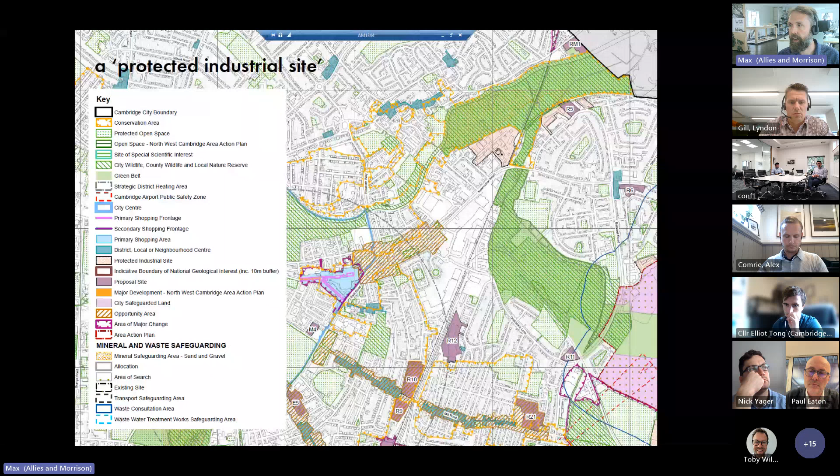It's a conservation area, and there's some really interesting ecology, and it's protected open space as well. So it's a very lush, green and open, well-used space, as you all know, and that contrasts quite significantly with the site itself, which is an important employment site, but in terms of quality of public realm is very much hard, dominated by hard surfaces and industrial, utilitarian buildings, vehicles and roads.

So the surrounding character contrasts really with the openness and green commons outside the site. There are a few notable features nearby, obviously the railway, but also the Leper Chapel, which is on Newmarket Road near the bridge. There are some views available on Newmarket Road with the Leper Chapel in the foreground, which we'll talk you through later.

Also the relationship with Stourbridge Common is really important, and how the building appears behind those trees. What we've done is structured this presentation and our ideas around nine key themes. I'll draw your attention to one or two of them.

One is this building's appearance. How much should the building be seen? Will the building be seen? How much should it be screened? How much will it be screened?

We're very keen to enjoy the silhouetted appearance, the layered silhouette that the building might offer against the backdrop of the trees and tree line of Stourbridge Common, and also the idea of introducing as much green infrastructure as possible, making it an enjoyable and safe environment, and pleasurable to be in, while maintaining those industrial uses and the good growth that Cambridge relies on.

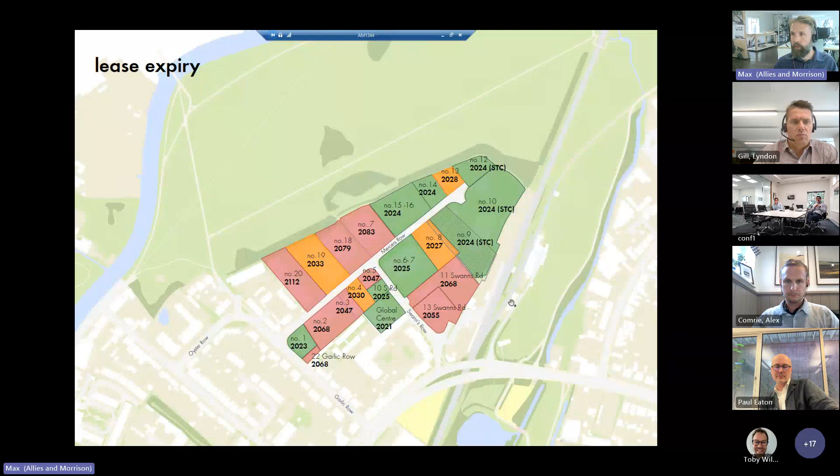The first theme is this idea of enabling change, enabling sustainable change. Here you have the lease expiry dates, and you can see in green the upcoming ones. The intention is, as Toby mentioned, to submit a hybrid application, so one that allows the earliest phase...

...which is available now and actually vacant already, and enabling works have already begun - some of the demolition has been carried out already - for that phase to come forward as a detailed application now or soon. Then phase 2, which includes a number of other plots on Mercers Row, some of which will be available soon, to come forward as the next phase.

Part of the idea is that this might enable and encourage wider changes, improvements and enhancements, particularly of the public realm, and also of the way the buildings relate to the street. That's a very important theme in terms of creating a strong street scene, which we'll come onto in a moment.

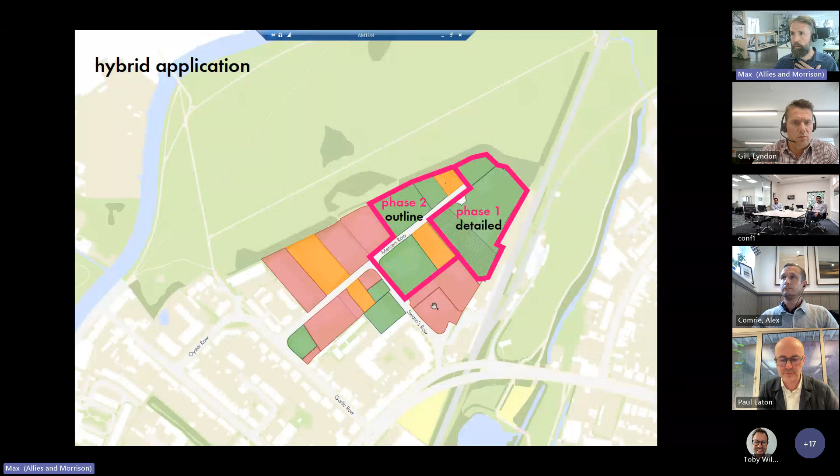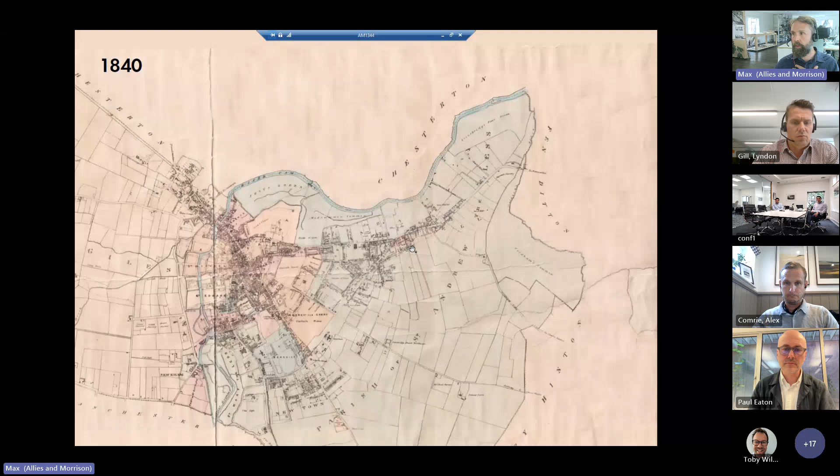One of our ideas is to really root this development as much as it can in the history of the site, in this special part of Cambridge. It's, as you know, sandwiched really between the river and a key artery into the city.

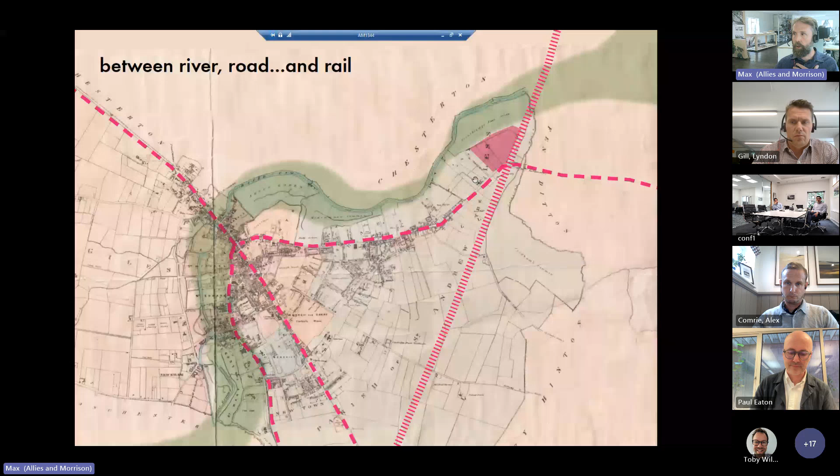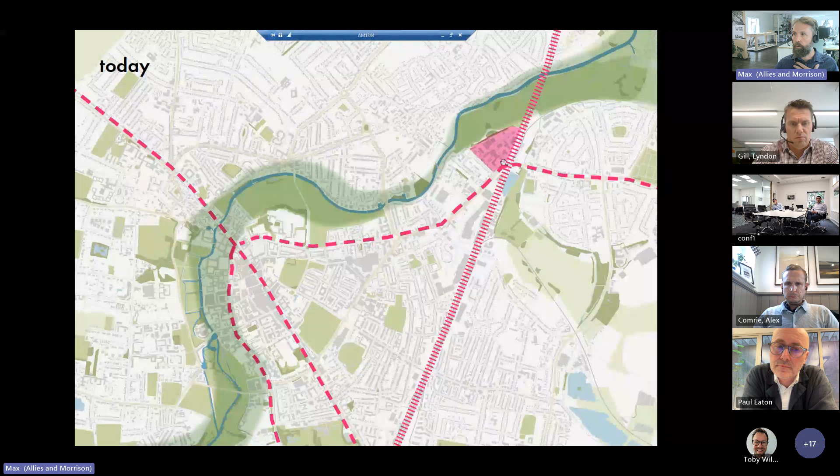It's in a part of Cambridge which was always more of a working, industrial part of Cambridge, and also latterly, with the introduction of the railway, became in a way a node between these three major pieces of infrastructure, which it still is today. So it's still very much dominated by its relationship to Newmarket Road, the railway, and the river, alongside Stourbridge Common.

The other element that we're really keen to understand and allow to influence our thinking around the site is the Stourbridge Fair, which I think is actually upcoming - the event in September to mark the fair at the Leper Chapel.

It was obviously at its time an incredibly active and lively coming together of all sorts of trades and industries, and notable members of scholars at Cambridge also, including Newton, purchased items there.

I think he purchases prisms apparently at the fair.

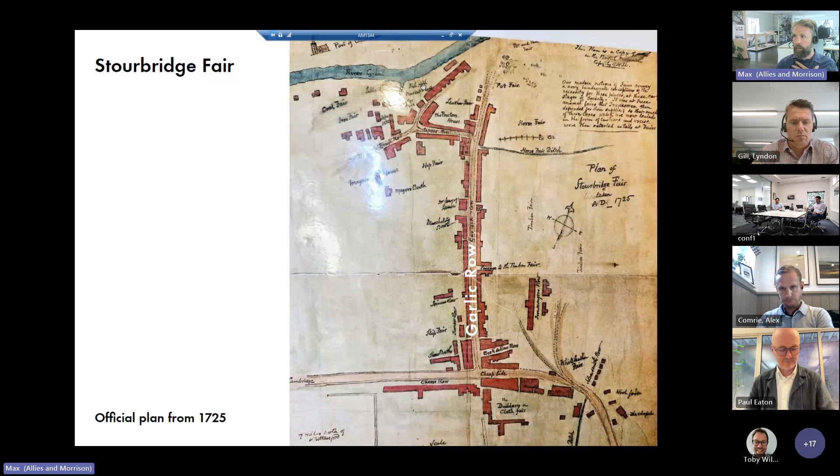It was a temporary event, and we were quite interested in how it has influenced and shaped the site today. Subsequently, industrial uses arrived, so its trade and employment character remained, but many of the buildings or structures were temporary. If you hold in your mind these tent-like structures, you might find some echo in the design of the buildings we've come forward with later in the presentation.

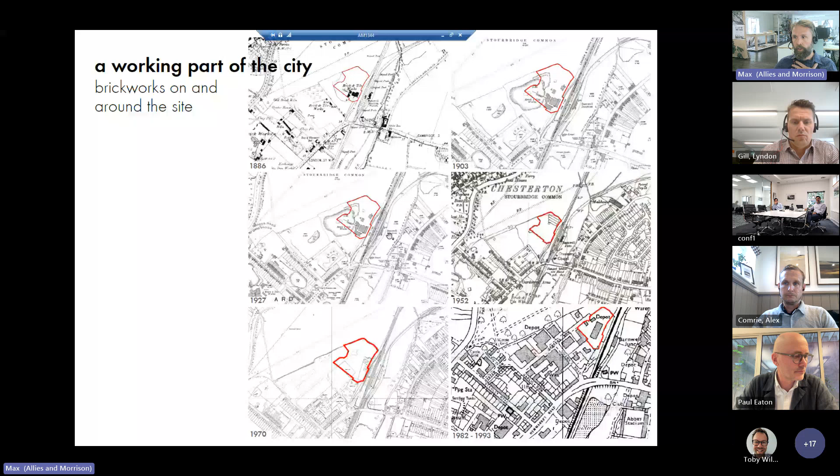So, after the Stourbridge Fair kind of lost its momentum, the site was largely taken over by industrial uses, including brickworks on and around the site, numerous brickworks and tile works, and there were significant excavations as part of that, which have led to the reservoirs or bodies of water near the site as well.

The railway, the arrival of the railway, and Barnwell, there's quite an important junction into Cambridge, and the gasworks, which are further along at the Tesco site. But here, interesting, you can see the excavations as part of the brickworks there.

Subsequently, many of the nearby streets or areas were redeveloped for residential. So at this moment, the site today has a mixture of uses, both employment uses and residential uses, and I think it's an important aspect which we'll come on to later.

One of the things we've explored through the pre-app process quite a bit is the potential for a wider connection from the site into Stourbridge Common. Now, this is not part of our application. It's something that the application will allow for in the future, should the council and the Stourbridge Common Nature Reserve want to bring that forward as an opportunity.

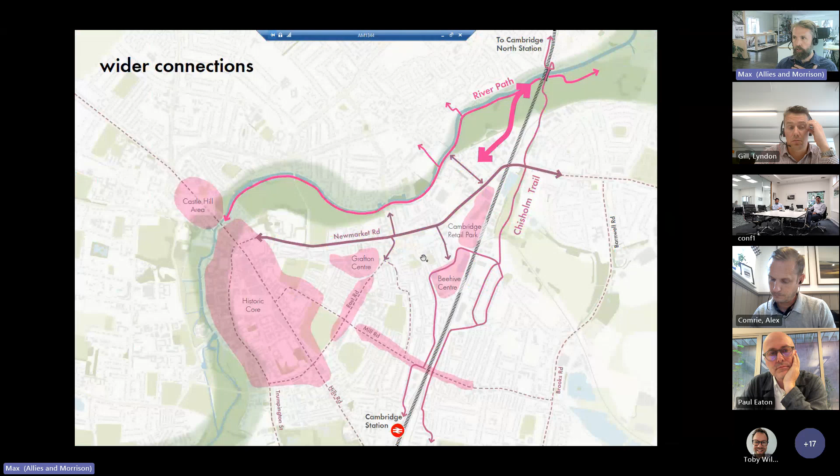But there is a potential opportunity to connect the river path that takes you all the way into the centre of Cambridge and to Cambridge North and to Fen Ditton, to connect that into the site at the end, and transform the site from a dead end, transform Mercers Row from a dead end to a potential through route into the common. But as I say, that's not part of this application, but is something we're allowing for in the future.

And even some of the uses that characterize the site today could be accommodated, right up to larger units, which are perhaps more suited to light industrial and production spaces. And indeed, there's an occupier at the moment - Levidian, who already occupy the site, and they're interested in a larger space. They're on their journey of growing as a company. They're a climate tech firm specializing in converting methane into hydrogen and graphene, and they're looking for space. So they're the kind of occupier that might take one of the bigger spaces.

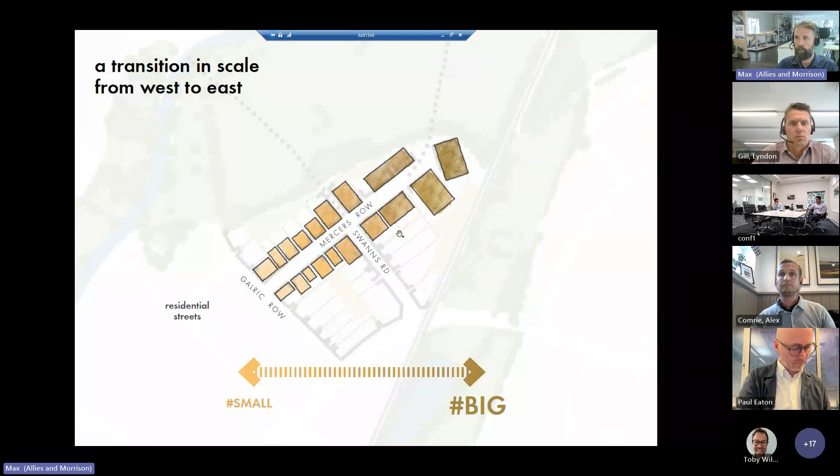So just to touch on the distribution, we felt, given the residential streets nearby, a broad strategy of larger spaces - this is already reflected on the site today, with larger footprints and larger scale further to the east, where they're relatively well screened and far away from residential - to smaller units along Garlic Row as a broad conceptual move. Obviously we're looking at phase 1 and phase 2 here at this end of Mercers Row, but broadly it helps to structure the thinking. So hold that in mind as to the scale of the units later on.

The other thing that's really important to us, and has dominated discussions particularly with urban design, is the idea of fronts, sides and backs to create a strong street scene. That's something not really apparent in the site at the moment, where many buildings have entrances at the rear, yards at the front, dominated by vehicle movements and vehicles full stop. It's often not clear where the entrance to a building is, where the streets are, and the street is very undefined.

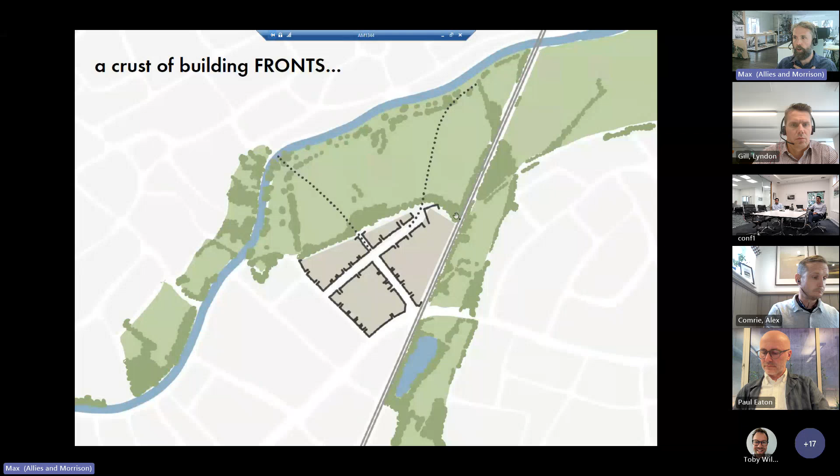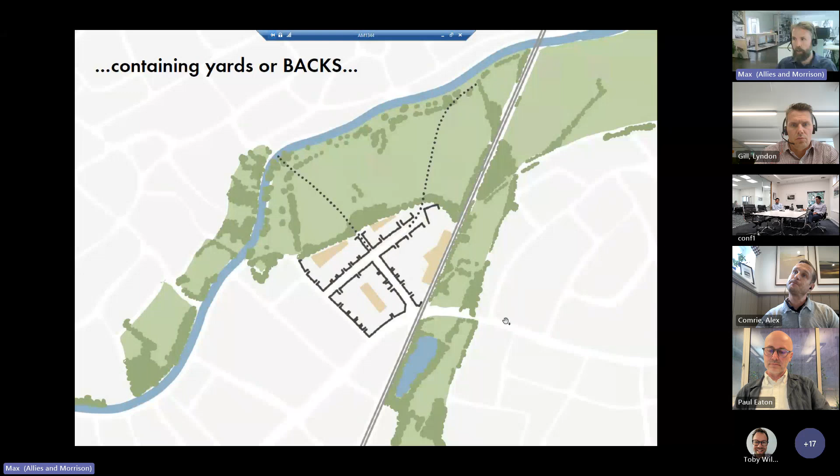It can be in places quite a hostile environment. So one of the ideas is really to create a strong crust of building frontages along Mercers Row, and then contain the yards and consolidate the yards, the service space, if you like, away from the street, where it's A, not visible, but also B, doesn't impinge on the pedestrian environment as much as it currently does.

So to create a separation of those spaces at the rear, where possible, consolidate them and confine them to the backs, and then connect them via lanes or sides of buildings, which are, where possible, as narrow as possible, allowing for vehicular movements when necessary, but avoiding impinging too much on the street itself or the character of the street.

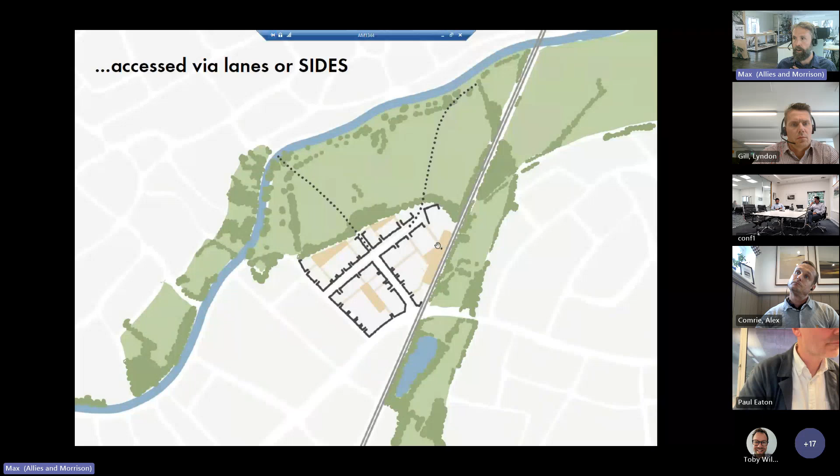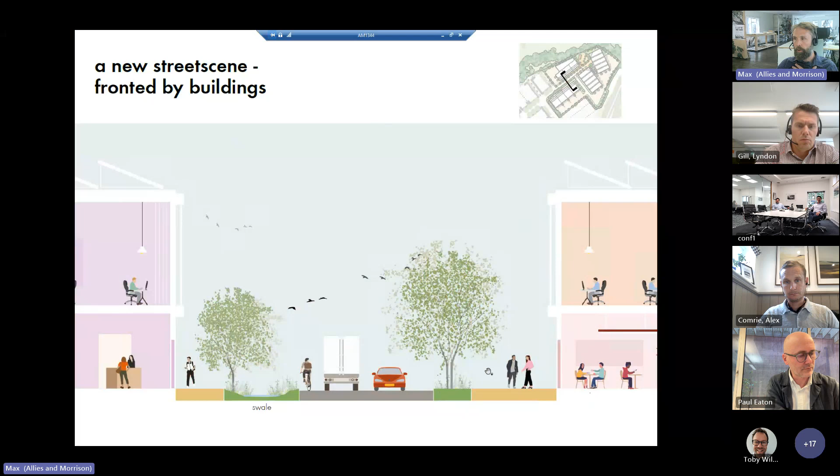So this is our conceptual cross-section for Mercers Row, if you like, where you have buildings with strong frontages, with active uses and entrances facing out onto the street, wider pavements, and introducing as much greenery as we can in the public realm, and then the yards at the rear, away from the street.

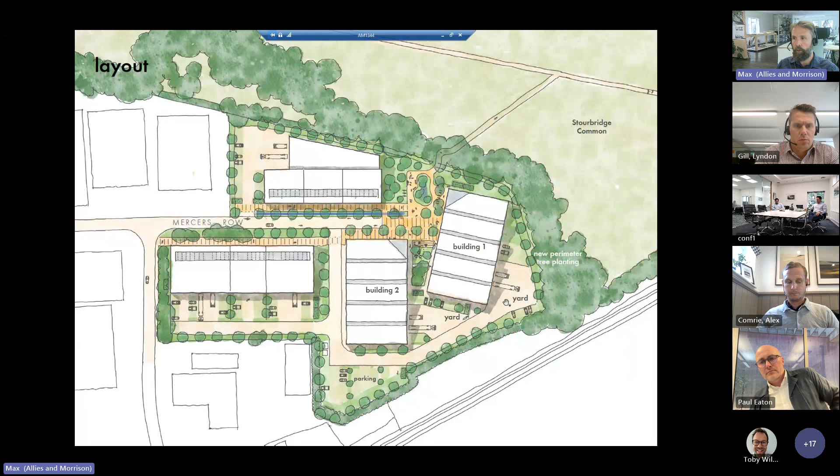And we've also introduced a new place to gather. So this is, you may have seen, a key theme of the scheme: the creation of a new square, or a pocket park, if you like, that acts as an arrival space at the very end of Mercers Row.

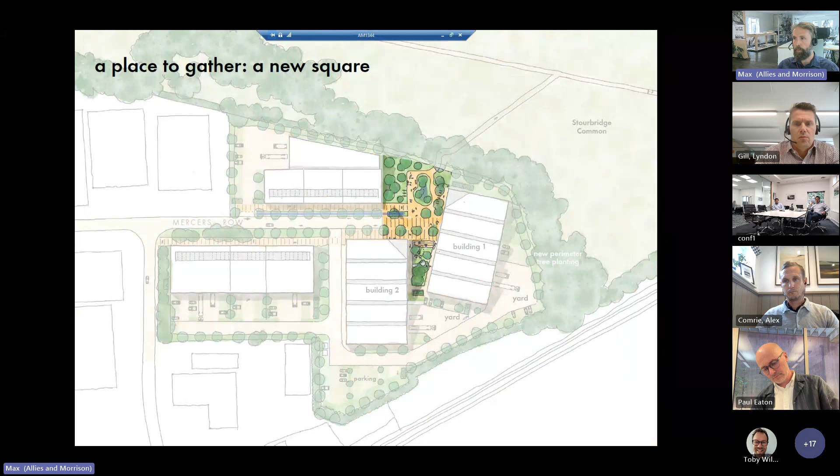We're able to stop up part of the road, so reduce the amount of adopted highway and give that over to public realm. In this area here, we've also introduced some green space between buildings 1 and 2 as amenity space, and then a space in phase 2 that sits just adjacent to Stourbridge Common.

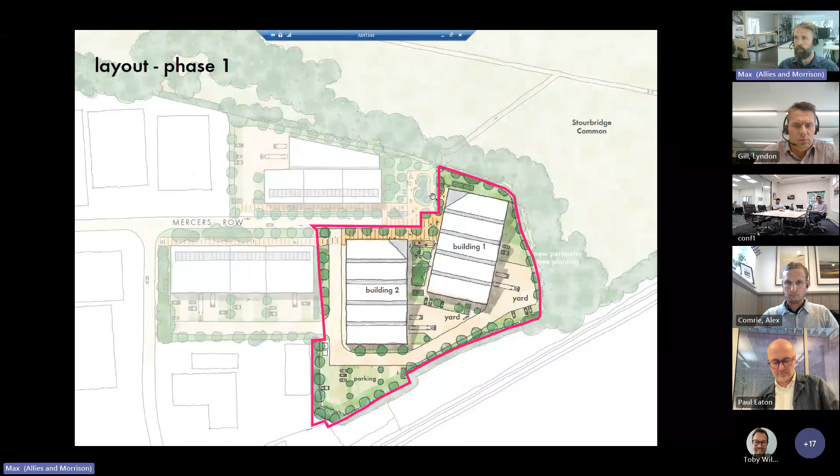So this is the boundary for phase 1, and you can see here this is the public realm that we're delivering as part of phase 1, and the remainder of that space will be delivered as part of phase 2.

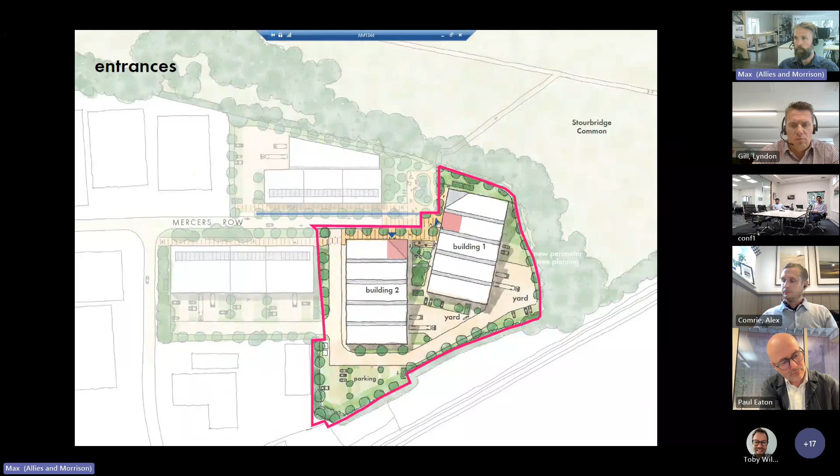It's very important to us also to activate that space, as I mentioned, so the building entrances have been placed at key moments along it. Building 1 has its entrance as a kind of termination to Mercers Row, and you can see we've angled building 1, partly for environmental reasons, but partly to accommodate the yards at the rear and screen those yards, as I was explaining earlier. We've placed the entrances of building 1 as a termination, and then building 2 on the corner there.

The other important feature of these two larger buildings is that they have an element of mezzanines which contain the office space. So what we've tried to do is place those mezzanines where people will be working directly adjacent to the facade in the office space. We've placed those in areas where they're overlooking the open spaces, so overlooking the public space here, and then overlooking the street as well. So we've thought quite hard about how the mezzanine relates to the other spaces in the building, which will be more industrial type spaces with higher floor to ceiling.

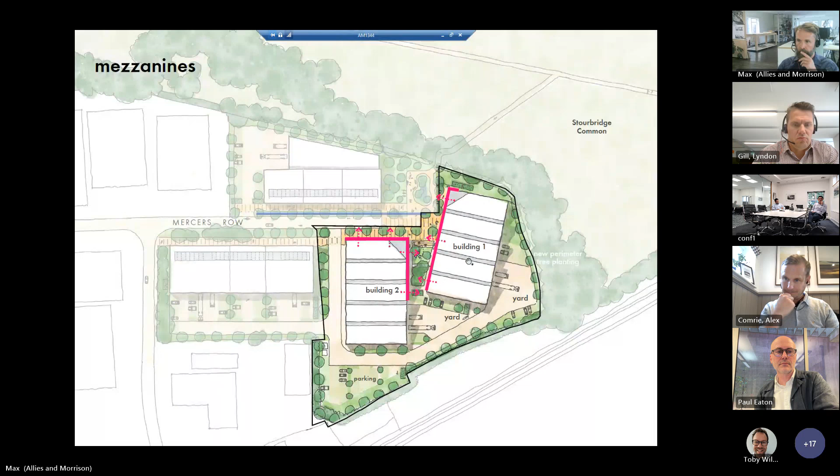So to move on to building appearance, we've been thinking very much about how these buildings are both screened and seen at the same time. And the relationship to the common is really the most important element of this.

While we're interested in how the building might appear and how there might be glimpses through the tree line, we're also conscious that we don't want light to become too dominant a feature of the view at night, and indeed impact on wildlife. So we've been thinking carefully about window placement to ensure windows are there where they're really needed, and contribute to an attractive setting for Stourbridge Common.

We've also been looking at scale, and there are some precedents of bigger buildings around that are quite visible from the common. For example, the Maltings at Ditton Walk, which is a large four-story warehouse building with a strong silhouette rising up behind the trees.

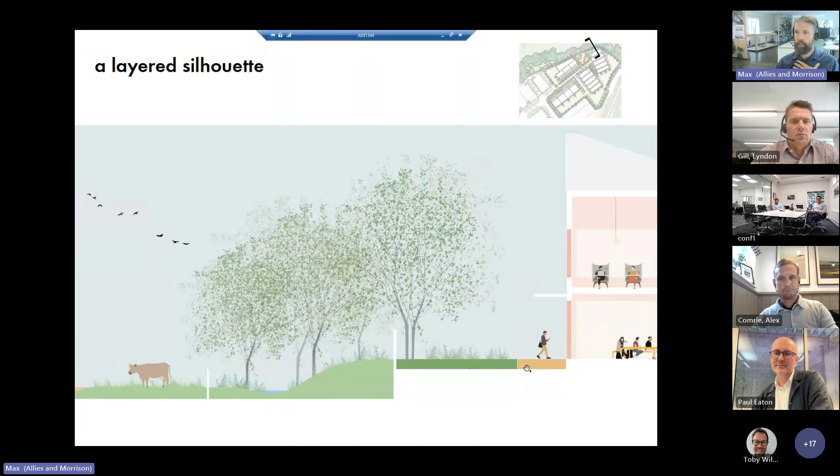We've been thinking quite hard about that relationship of the buildings to Stourbridge Common. It's worth saying there's a change in levels, so the topography rises up towards our site, and there are multiple bands of trees which we're aiming to strengthen. So you have a lower layer of bushes, then smaller trees, and then a line of mature trees.

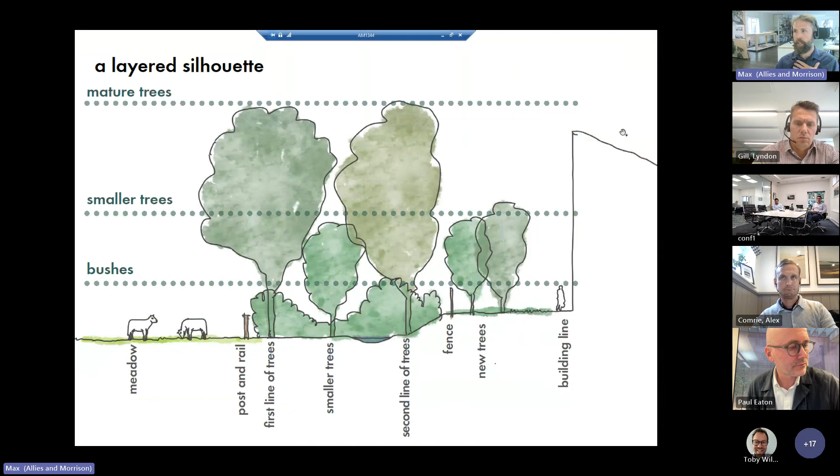What we want to do is strengthen that silhouette and strengthen that green belt through new tree planting along the edge of the site. But at the same time, we're keen that the tops of the buildings contribute to that layered silhouette. So we don't want to shy away from these buildings being visible. In fact, we're quite keen that at certain times of the year these buildings, or at least the rooftops, will be visible and contribute to this kind of layering you already get on the site.

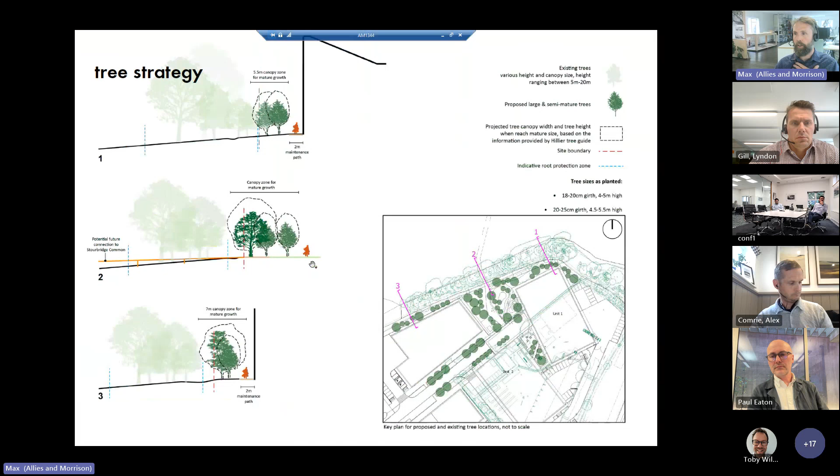This is one of Alex's, the landscape architect's, drawings, which shows how we've allowed sufficient space for new tree planting all around the edges of the site for those new trees to flourish.

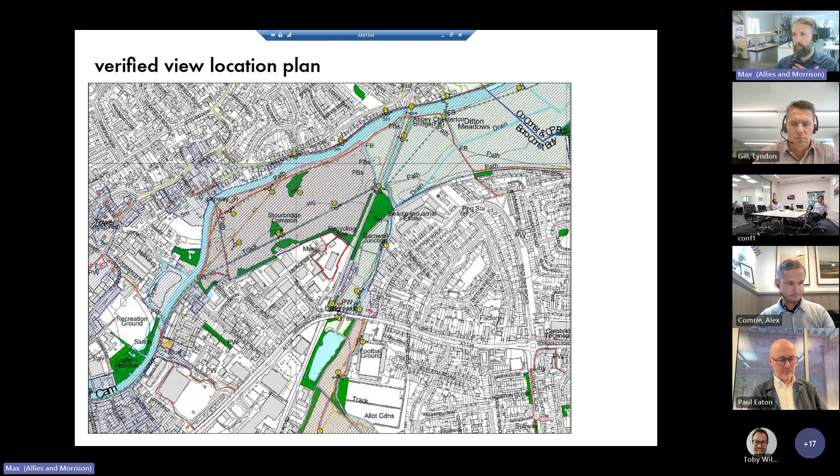In parallel, while we've been looking from a design perspective at how the massing is informed by the setting, we've also been carefully looking at the landscape visual impact assessment and key views.

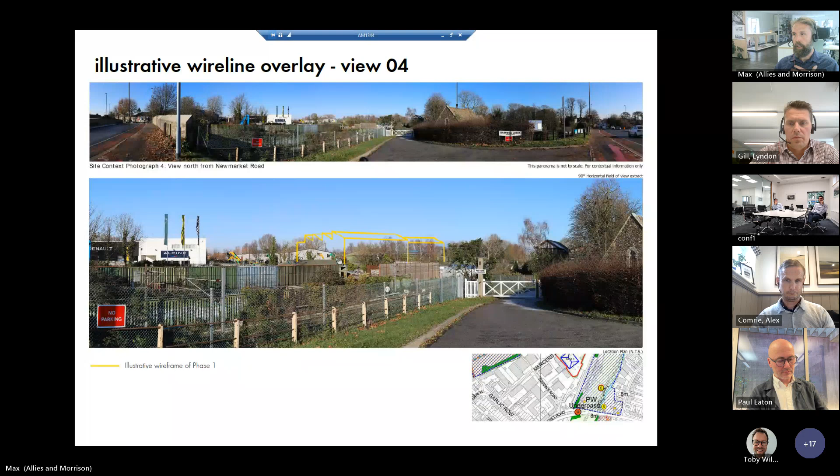We've identified over 20 views which have been tested in quite some detail, including from the Leper Chapel. This is the view from the Leper Chapel, where you can see the proposed outline of the building, broadly in line with the existing tree line and existing buildings on the left. We've actually added a new view, view 23, to show the relationship directly with the Leper Chapel, where the building sits directly behind it.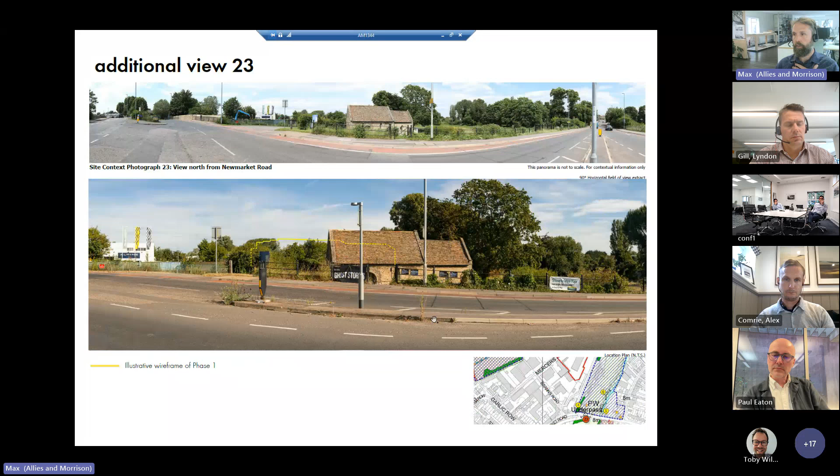As you can see, the emerging forms we're looking at, and the colour as well, which I'll come onto in a moment, sit quite comfortably with the green tones and the tree belts of Stourbridge Common.

To touch on form and the massing of the building, one of the things we've been thinking about quite hard is orientation and relationship to the sun. We've introduced a series of north lights to help bring daylight into the larger workspaces here.

Here you can see the mezzanines facing the streets, and then the larger workspaces. The introduction of sawtooth roofs allows us to bring in diffuse daylight from the north, which is not subject to solar gain in the same way other windows in other orientations would be, and also lets us introduce photovoltaics onto the roofs, producing an articulated skyline, as well as visual interest internally to make pleasant spaces to work in.

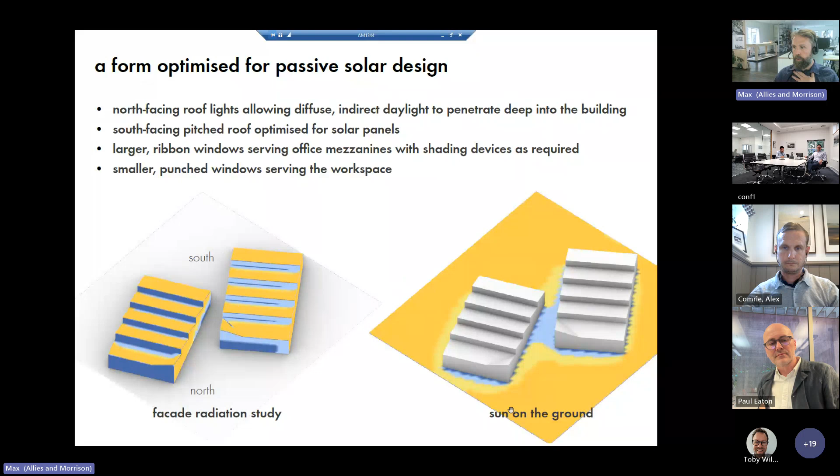That's a key feature of our design, which we've tested rigorously in terms of the facade and solar radiation, to ensure good daylight to the PVs, good radiation to the PVs, and that the roof lights don't receive solar gain. At the same time, we've ensured we've got sufficient sun on the ground at key times in the open spaces. This is an early concept sketch illustrating this.

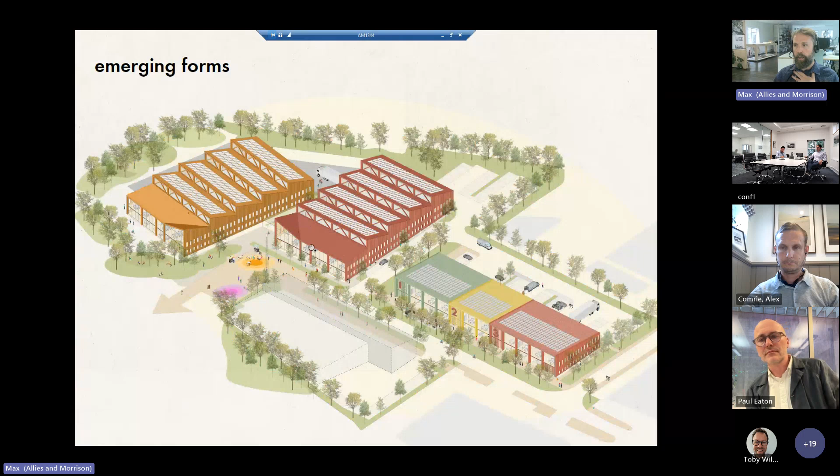We've also introduced a kind of flick to the roofs to mark the entrances. This has moved on a little bit, but we've retained a flick at the corners, which you'll see in a moment.

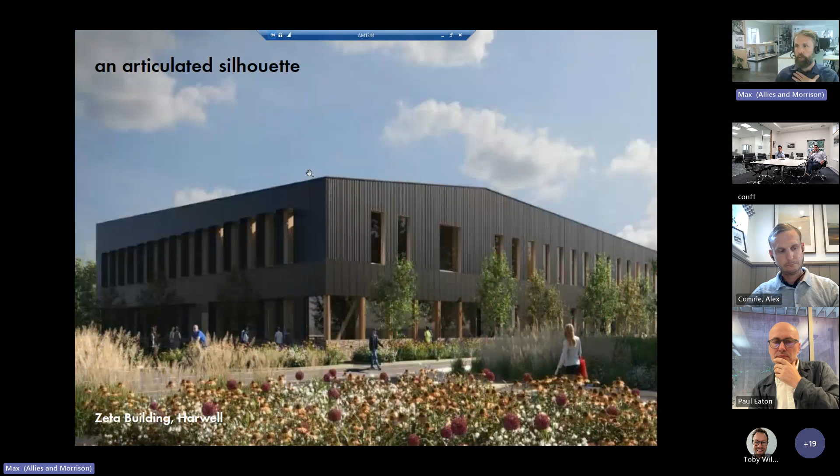Here are some examples of other projects in similar settings, in this case with a kind of pitched roof, forms and roofs that rise up and down. This is our project at Harwell, which again doesn't have the sawtooth arrangement, but the tones of the buildings and their setting within the landscape share lots of parallels with this project.

So talk about the windows. An idea we're exploring is that of punched openings. We debated whether the building should have a more frame-like character or a punched opening character. For solar gain reasons and lots of others, we've concluded that punched openings, so smaller window-like openings, would be more appropriate, including for the office areas. It helps with light spill as well as solar gain.

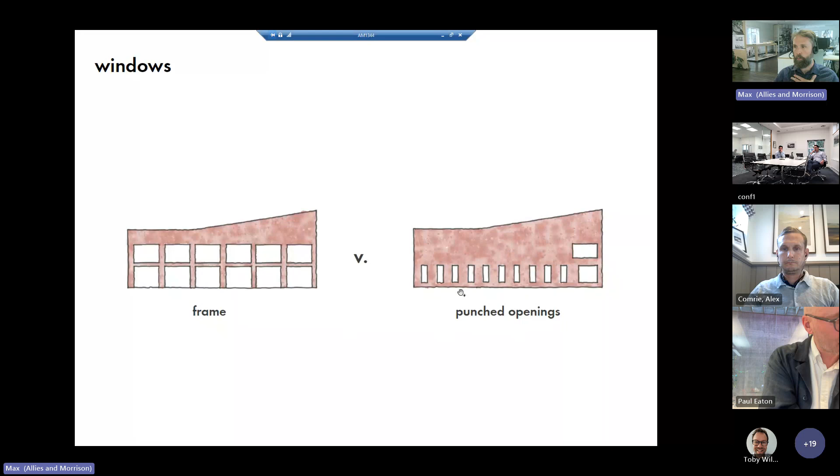We've looked closely at shading, and we're introducing vertical shading elements to help with solar gain, which we've tested in quite a lot of detail to ensure they work.

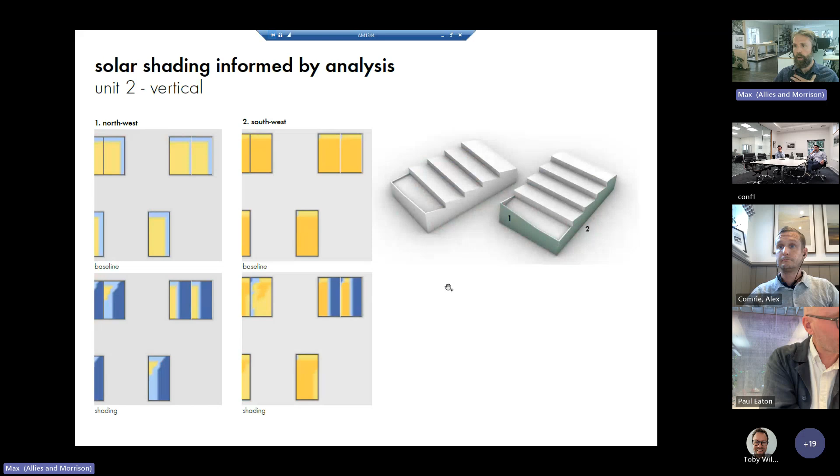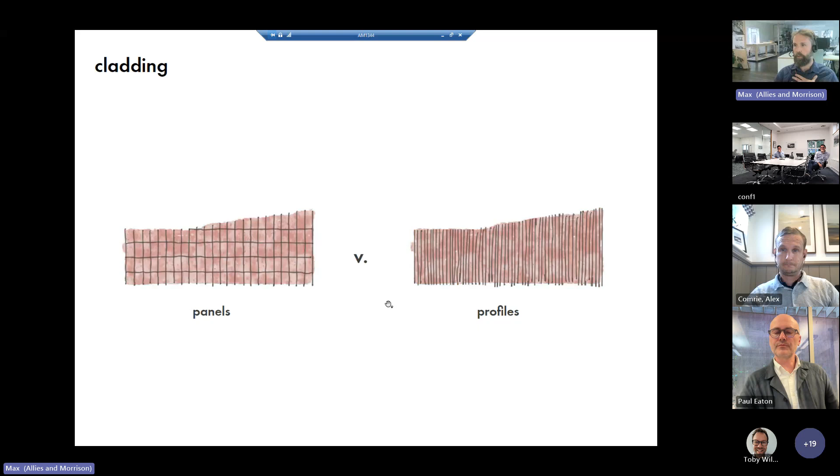We've thought long and hard about the cladding and whether it should have more of a panelized appearance or more of a sculptural appearance as a unified element. So this is what we've alighted on, using profiles to create a more unified, sculptural element rather than a panelized system which introduces a facade grid. These also allow the introduction of windows in a more informal way.

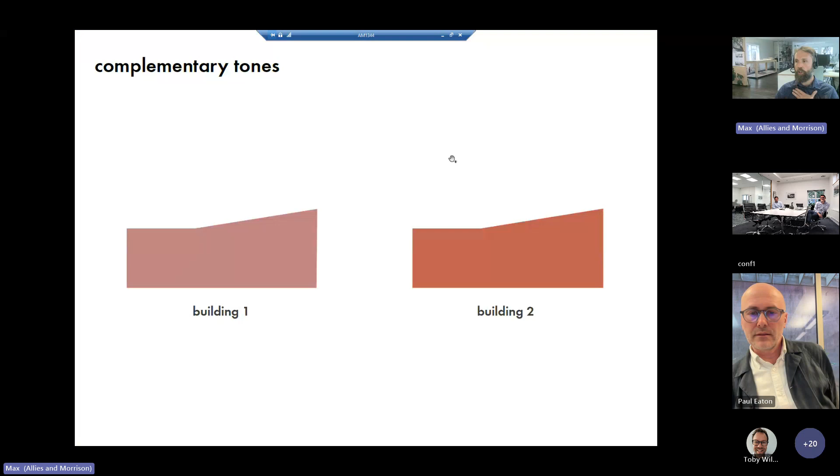We've also looked at tones, and at the moment we're exploring how the two bigger buildings might have two complementary reddish tones. We're still working on that, so bear with us - these are not the final colours, just a moment in time.

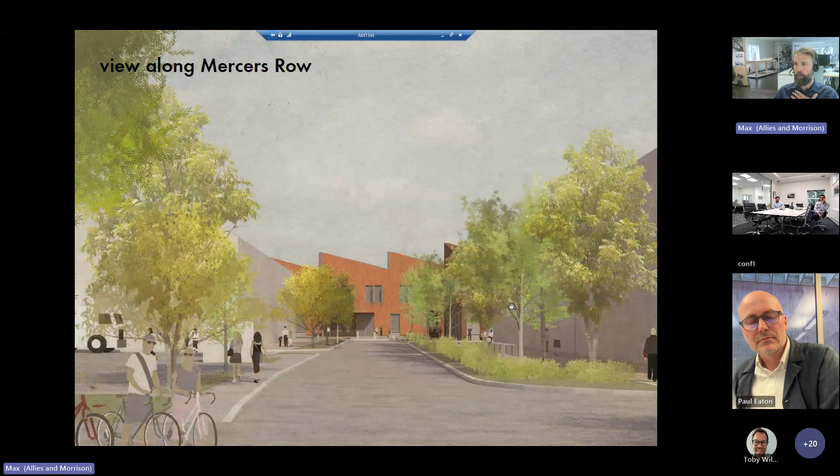To conclude on the appearance of the building in these views, here are some of the key views. You can see unit building 1 terminated along Mercers Row, and then building 2 appearing in the street scene there.

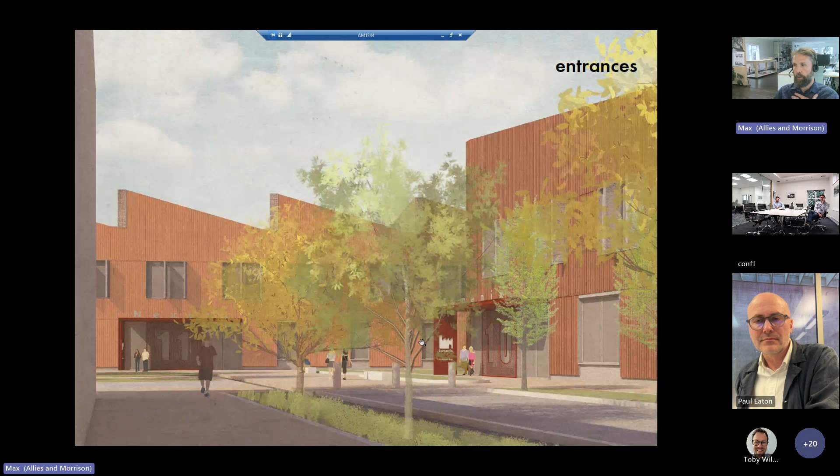I'm conscious of time, so I'll skip through some of these slides. These are the entrances to the buildings, which we're characterizing through an articulated canopy with a deeper hue. We think using the reds as a theme to introduce color works really well with all the green around the site.

Could be quite an enjoyable palette of tones. This is some of the latest colors we're looking at, but as I say, we're still exploring those.

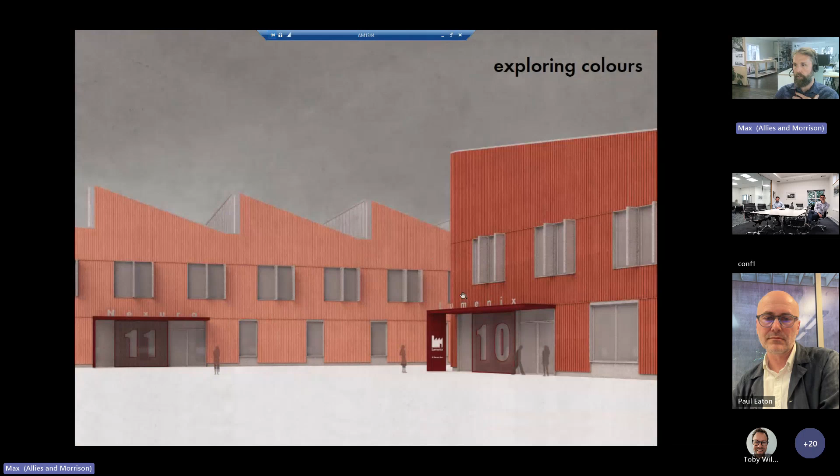In terms of materials, we've thought long and hard about the opportunities. It's a lightweight building with a lightweight frame, so we're quite limited in terms of what materials we introduce. A metal clad system is incredibly efficient in embodied carbon terms, gives us flexibility, and reduces the need for heavy structural elements. So it's very much a lightweight structure, a lightweight skin on a frame.

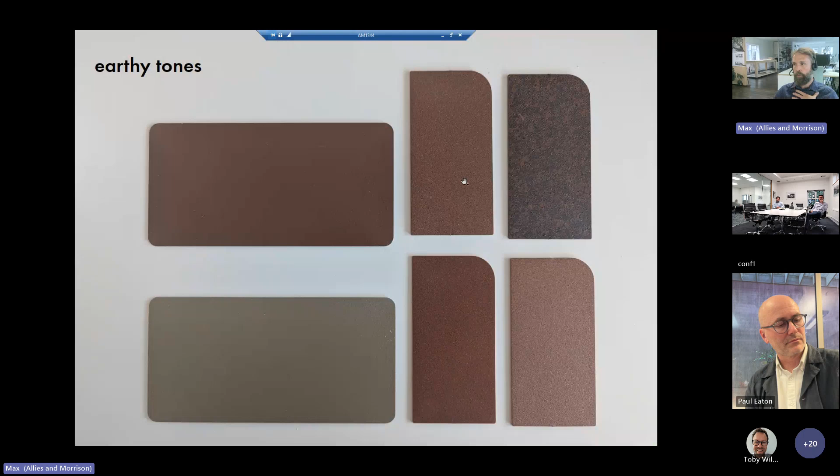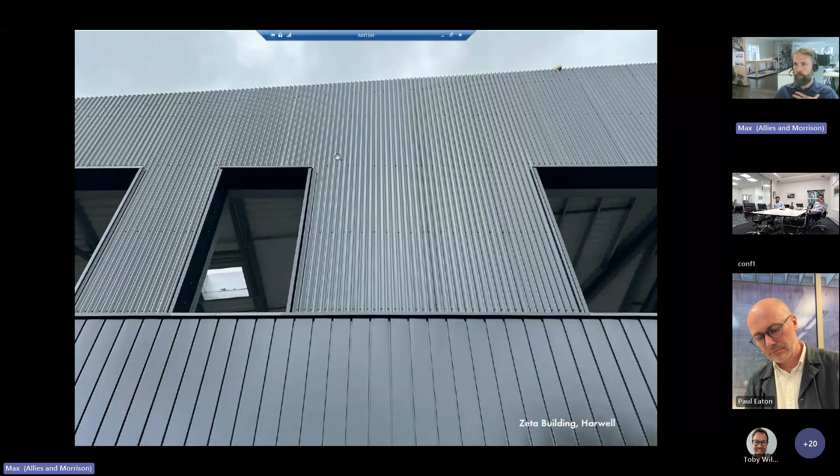The tones we're considering are kind of earthy reds at this moment, inspired a little by using a sinusoidal corrugated profile - inspired by more of an industrial aesthetic, and also an agricultural aesthetic that the use of corrugated steel can sometimes evoke, along with those red tones as mentioned.

For the roof lights, we're looking at potentially translucent polycarbonate. We need to test whether that's possible in fire terms, but that's another idea. And then the use of contrasting metalwork, potentially grey, to allow the reddish hues to be dominant.

Sustainability - I'll just touch on this, it's quite important. We're targeting a BREEAM Outstanding and an EPC of A+, which you may well know we achieved at Brooklands Lockton House, also with Rembridge, which is why photovoltaics and orientation are so important. That's a key driver for the project, and I think we're doing quite well on that front at the moment.

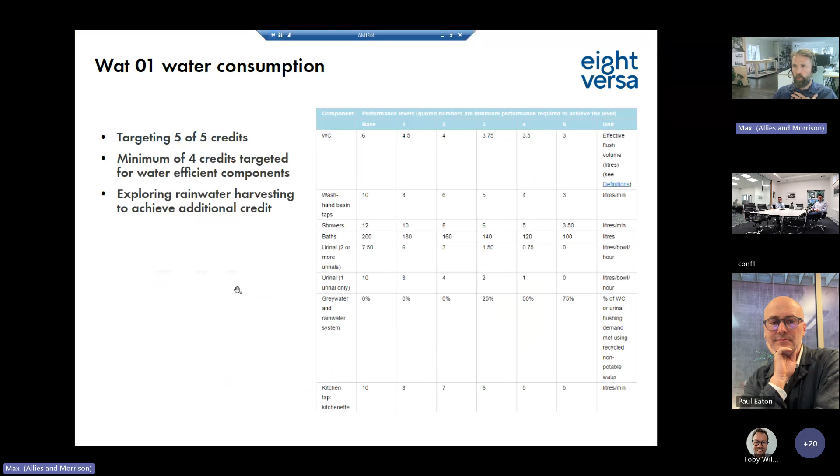We're also targeting a minimum of 4 credits, and aiming for 5 credits for WAT01, and exploring whether we can introduce rainwater harvesting to achieve an additional credit.

We're also carefully looking at embodied carbon. I won't go through this in detail, but we can touch on it in the questions if you're interested. We're looking at opportunities to introduce recycled content, potentially use mass timber or CLT for the mezzanine floors, looking at cement replacements, and broadly the omission of finishes.

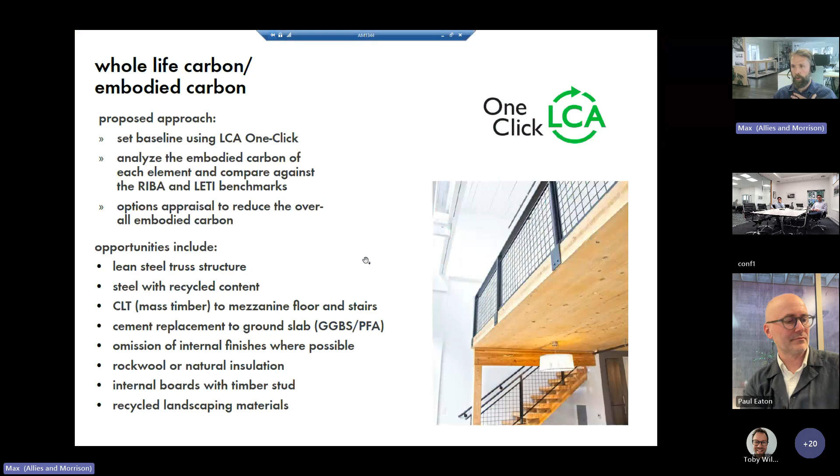We're looking at lean buildings as much as possible. So before you even think about replacing a material with a lower embodied carbon, do question whether we need the element in the first place. So relatively lean and flexible buildings, and then passive measures, as I've already talked about. We can come on to this if necessary.

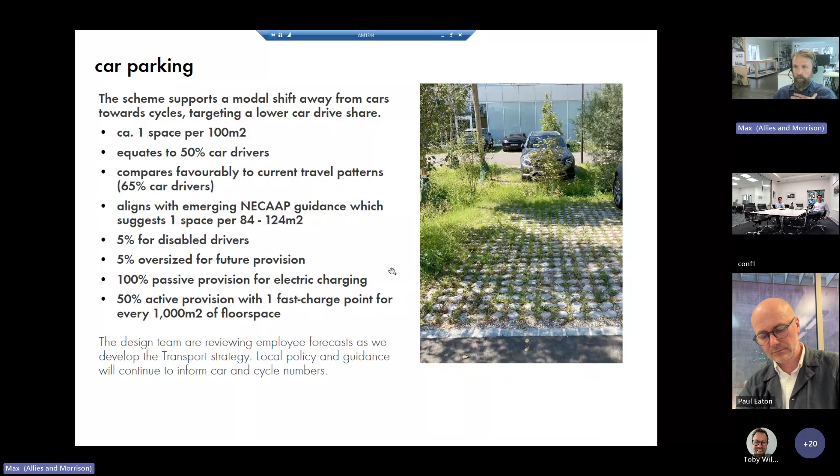Worth touching on movement, no doubt this will be one of your questions. We've allowed for 1 parking space per 100 square meters. We're broadly supporting a shift away from cars, so a significant reduction in movements, which compares favorably to current travel patterns with around 65% car drivers. We're obviously introducing parking for disabled users and electric charge points and so on.

In terms of cycle parking, we're looking at 90 covered cycle parking spaces, all of which will be Sheffield stands, plus parking for non-standard cycles, with end of journey facilities, showers and so on within the buildings, which is currently non-existent. So in terms of other sustainable modes of transport, this will be quite transformative for this part of the city, including a bike hub with a repair station.

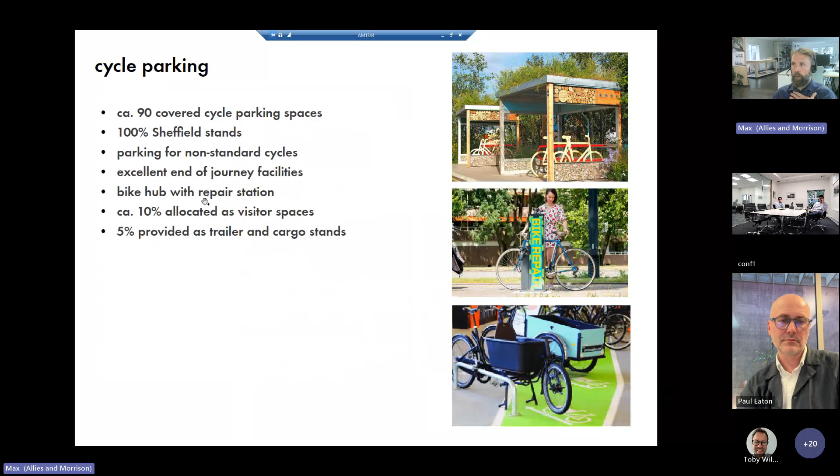HGV movements - thought this would be interesting to touch on - the scheme will significantly reduce the number of HGV movements compared with those at DS Smith. This is based on actual trip information from DS Smith, who were the occupants of the phase 1 site previously, and based on that trip data, we're looking at a significant reduction in movements over the course of a typical day.

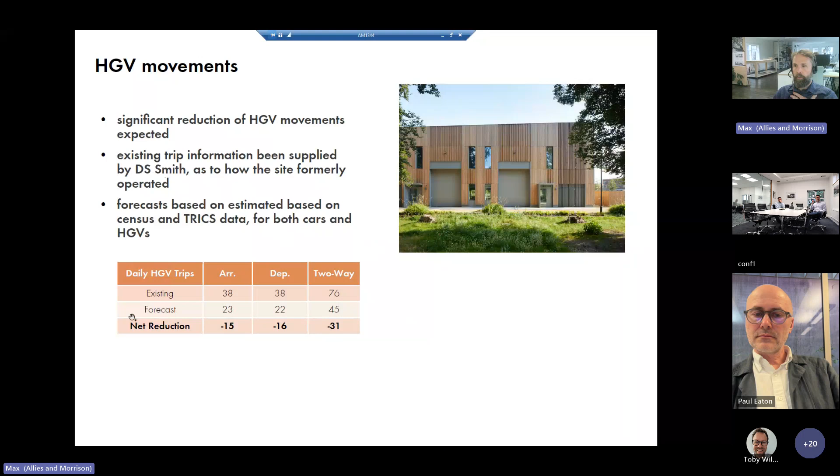So Alex, I'll hand over to you. Sorry, I've overrun slightly. Thank you.

Thank you. Thanks, Max. Yeah, I'm just conscious of time. I've got quite a few slides here, but I'll whiz through them quite quickly. A lot of what I'm going to talk about, Max has already mentioned, but we've been working on the landscape with Max and his team for the last couple of months, and what you're about to see here is the story so far.

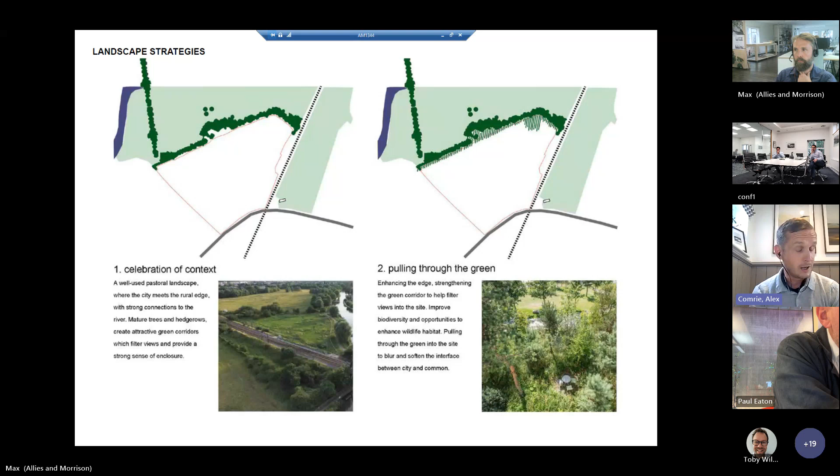As Max mentioned, the context of the site is incredibly special and exciting, especially from a landscape perspective. One of the key things was to try to improve the relationship between the common and the site - the idea of pulling some of the green natural beauty of the common through into the site was something we explored, as well as improving connections to the common. Next slide please, Max.

We started to think about how those routes might work and how the spaces within the site could work. At the moment there really weren't any spaces for humans to come out and celebrate and spend time within. So one of our first key ideas was that we should create somewhere where people could enjoy the site and travel through it to make it feel safer and more welcoming. There was also a very strong strategy from early on about how we might green the site - planting street trees, and also blue and green drainage systems.

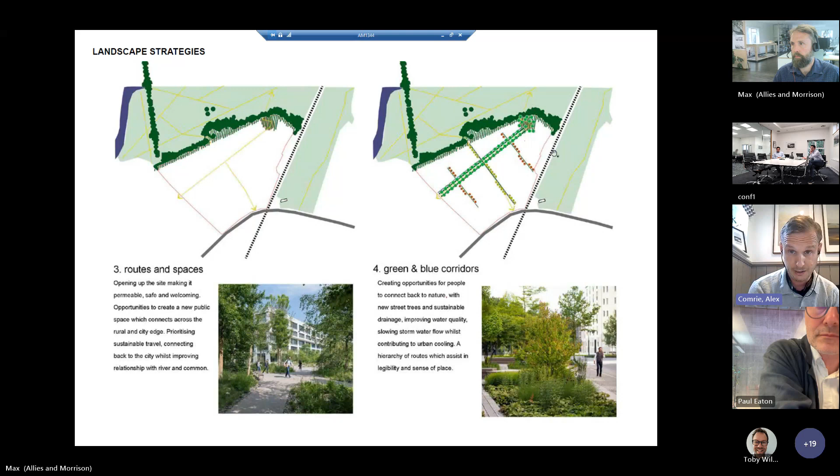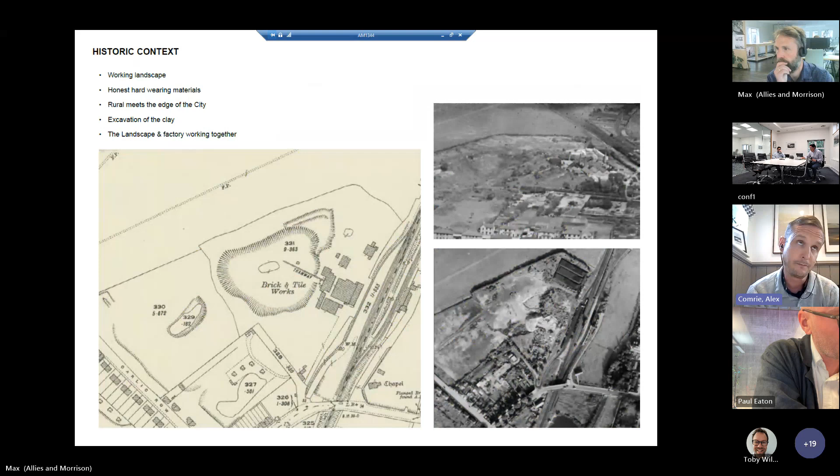Next slide please, Max. Max has also touched on this, but it's influenced the landscape too - we've started to get really excited about understanding the history and heritage of the site, and there are lots of positive elements we can take from that, whether it's material choice or reflecting the industrial history of the site within the landscape.

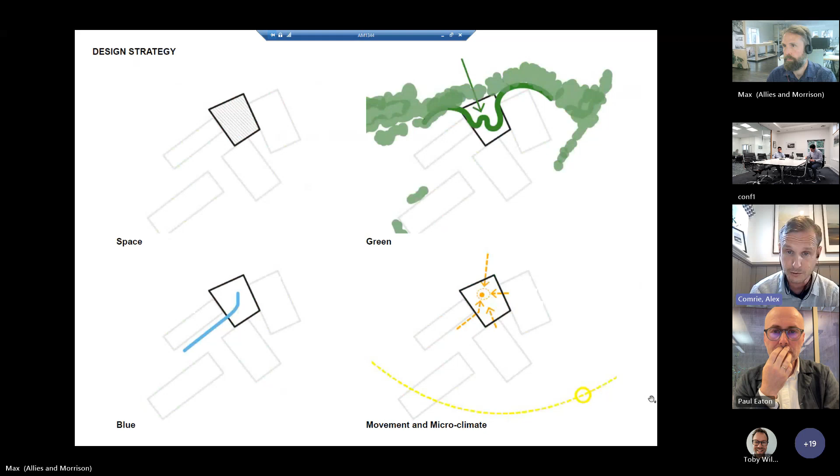Next slide. We started to look through various concept ideas, and we had to work with Max to understand where the building entrances were so that the spaces were in the right place - could that function as a space?

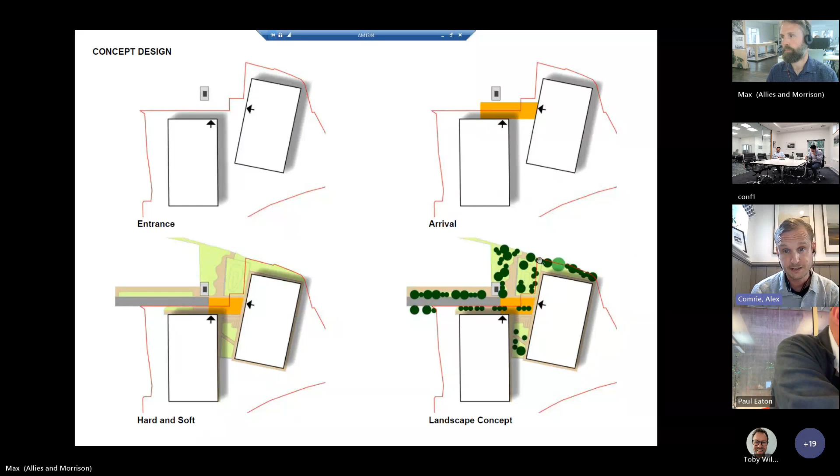Balance of hard and soft, we had considered that to make sure they weren't too hard, they weren't too big, they had human scale, they could be used when it was busy, but also when it was quieter, and it was comfortable for people to use those spaces. And we started to think about how the trees and the planting would really improve those spaces, but also work as an industrial character as well.

So this is the emerging master plan. It's been updated a few times. We've sat down with the various officers and they've been really helpful in the process. You can see the red line boundary for phase 1 and how we're looking to deliver a lot of planting and softness in the first phase to make sure those first 2 units have a quantum of green and also an area for them to use.

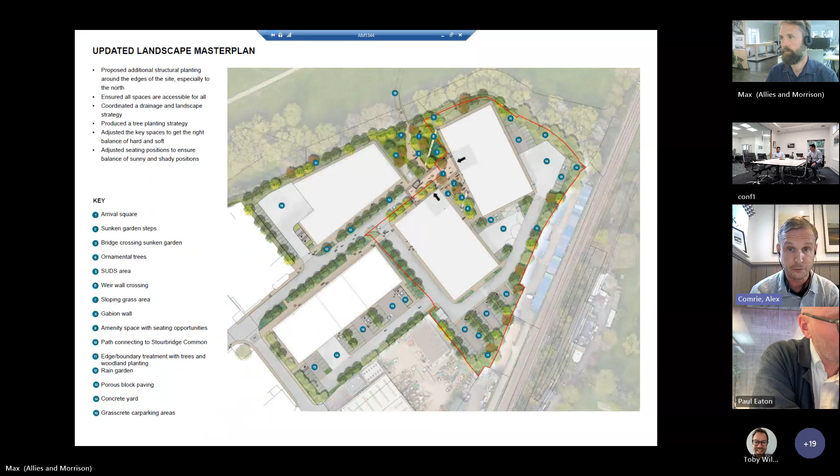So in between the 2 buildings, units 1 and 2, you can see there's a central core green space, which is actually quite a decent sized space, and there's also a really nice arrival square for units 1 and 2 as well as some street trees. If we go on to the next slide, this is just a zoom in of that space to give you an idea of its scale and how it might address the front doors to the units.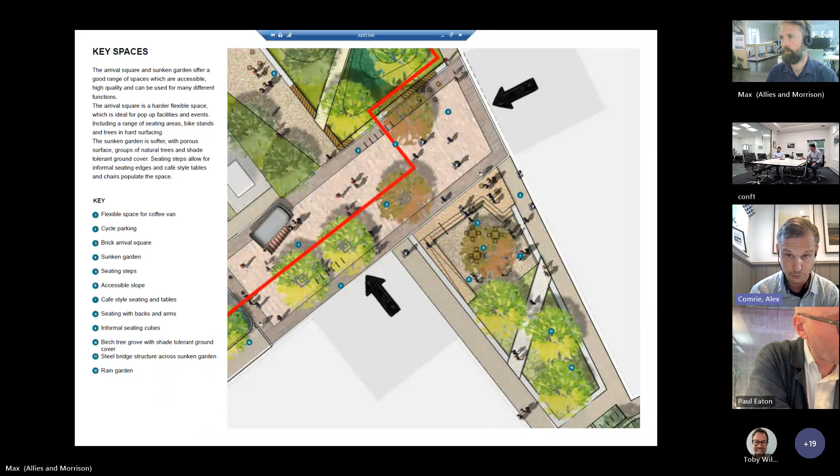It's a flexible space with planting in it, seating in it, a bit like these images here. It also has a sunken area. The reason is because we're using it as part of the drainage strategy for peak flooding area, so it's flood attenuation, it has drainage capacity. It's trying to make the landscape work really hard, have lots of different uses, but also to be appreciated and used by people and include planting. So it's working quite hard on many levels, which has been well received by a lot of the officers.

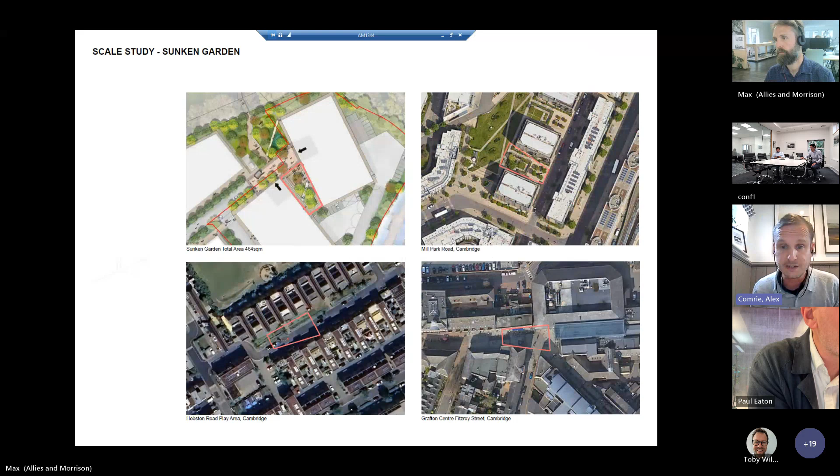We looked at where the sun tracks around and where the shade areas were and where the sunny areas were, and that has influenced where we put seating to make sure they're comfortable to use, but also seating in areas which would have shades, because not everyone likes sitting in the sun. So providing a range of different seating opportunities and resting opportunities for people.

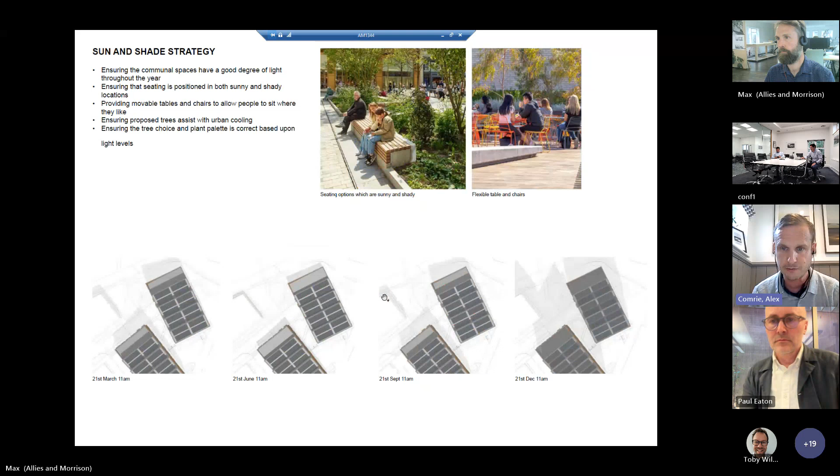We've looked at materials strategies, particularly to move away from dark materials which retain heat. We've looked at porous materials. We've looked at decent quality. We've got a hierarchy of materials that travel used throughout the site. So we're using good quality materials with historic references like the brick within the square. Other areas we're using more porous materials, especially parking spaces, to improve, slow the flow and improve the drainage strategy for the site. And we're also using gabion baskets where we have sunken areas. We're going to use recycled crushed material from the site as well. So that's a really good sustainability message as well.

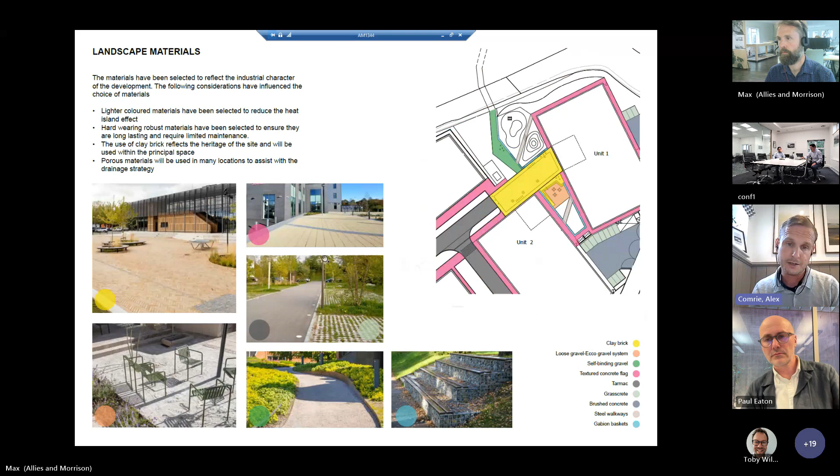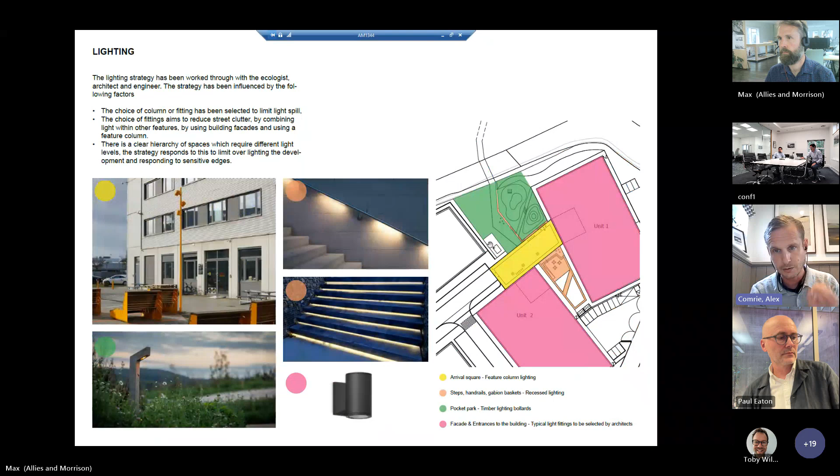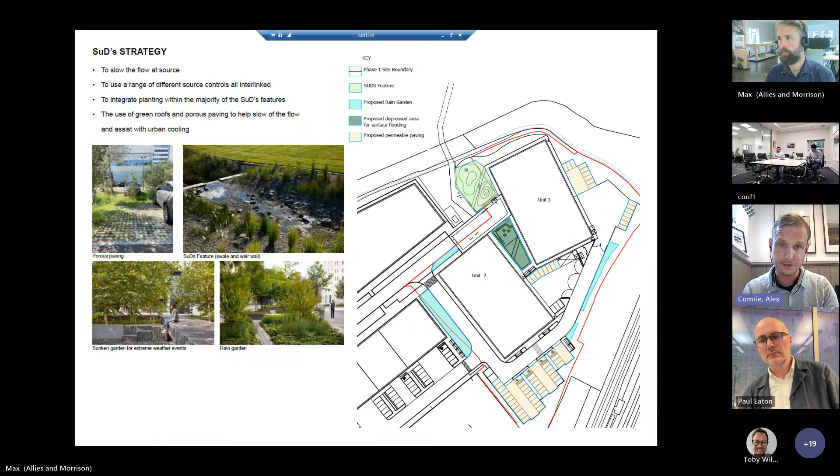We've worked with lighting engineers at the moment, looking to not overlight the site, make sure we don't have lots of street clutter. We've put columns, using things like handrails and changing the step level just to try to create light and to light from the buildings. We've worked with the drainage engineers, and we've got a drainage strategy where we've got a whole series of different ways of slowing the flow, from rain gardens to porous paving to swales, and obviously there are some elements of crates that we need to use just because of the scale of the hard surfacing on them. So if you go to the next slide, just some images of the different ways we were thinking of, so porous paving, grasscrete, swales, rain gardens, and SuDS features.

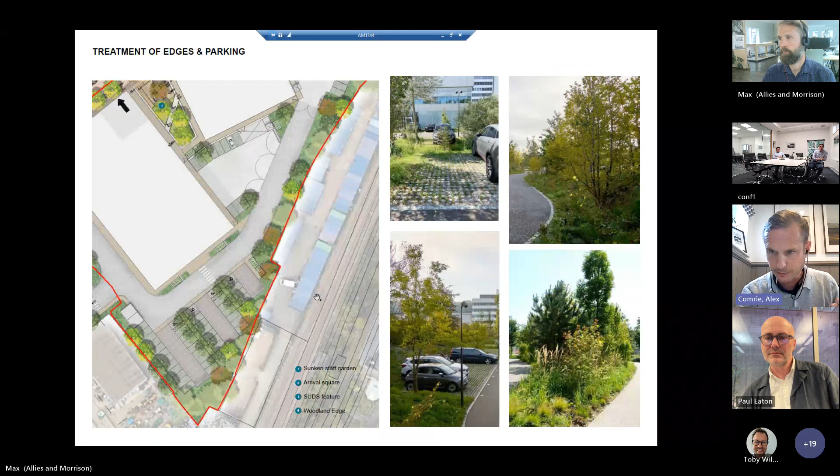Thank you. This is just about the edge. We obviously understand the edges of the site are quite sensitive, whether they are facing the common or back towards the Leper Chapel. So we have deliberately made sure there's a decent landscape buffer around the edge of the site to help soften that site and help it sit comfortably in its context. We've done a tree strategy, so we know exactly the number of trees that we're removing.

The trees being removed, of which there are 12, are all low quality C or U quality trees. Within phase 1, we're replacing them with 50 new trees, and phase 2 is a further 72. So we're very confident our tree planting strategy is very strong. We've done a study on the type and consulted with Alex.

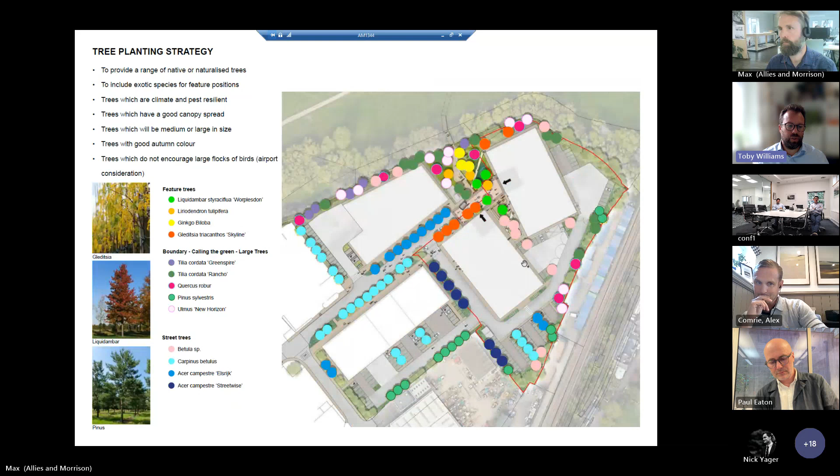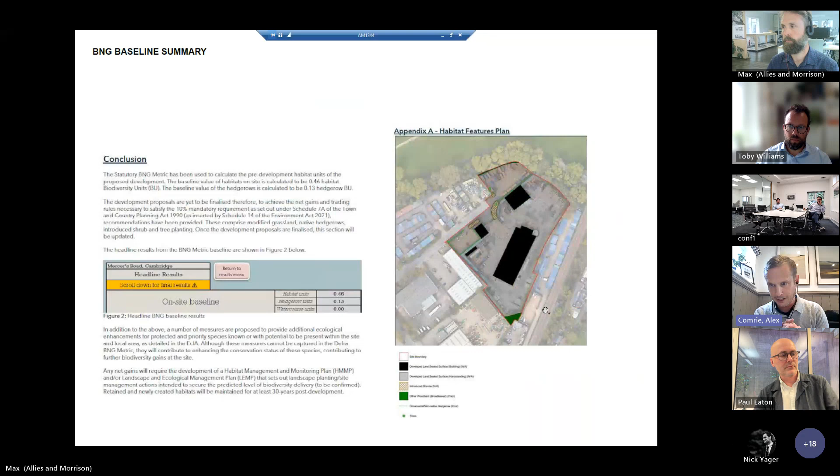So ultimately, we've done a tree strategy, and we're also doing an urban greening factor, working with biodiversity net gain and colleagues to ensure we achieve 10% on BNG. We're also doing a canopy cover calculation, and at the moment we are hitting and exceeding the London Plan urban greening factor calculation. That's just demonstrating that we're making the scheme as green and ecologically rich as possible. That's it, I'm done.

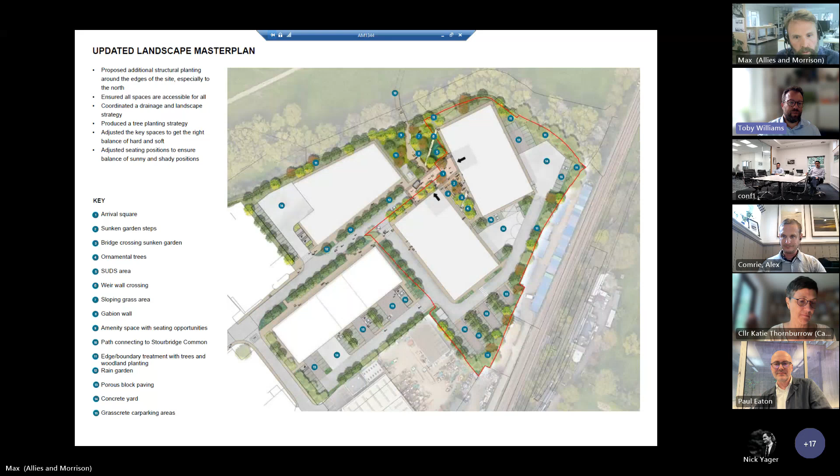At one point when you talked about the unit sizes, you used square feet, which is really for commercial sales and rental. We would much prefer in planning committee to have square meters.

I think it was really great to have the introduction include the site analysis, the development of key principles for the design, and also understanding the landscaping. The way you've presented it was a really good way to understand the site and how the ideas are being developed, and I hope all of that went through with the planning team. It's really great to have so much emphasis on the landscaping and the connection with historic landscaping and historic uses. I really like the way you're thinking about opening up, making it more accessible to Stourbridge Common and other routes around Cambridge. Really interesting plan about the other areas being developed nearby. Really valuable. I think it's great to have it in this presentation, because we don't have that understanding or time during planning committee. So it's a shame that during the planning committee we won't have that background, but it's good that we've had it here.